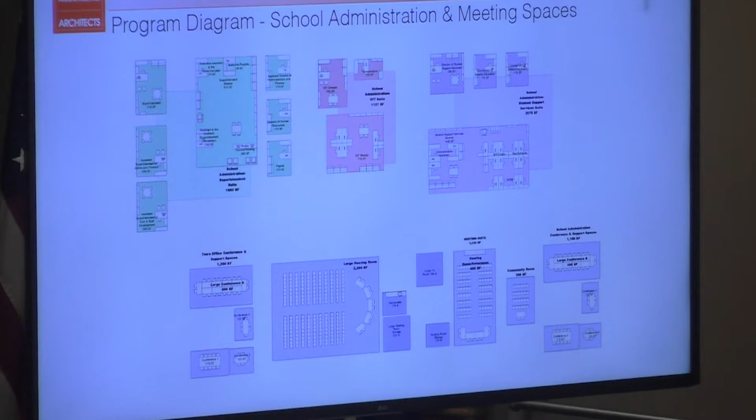We have our engineering office in this building, as you know, and that's already included here. It sounds like, and again, I'm not sure why we didn't pick this up earlier, but there would be some advantages to having the administration in the same place with engineering.

There's 6 people that are in that space right now over at Browns Crossing, so I don't know what that would do to the plan here. Obviously, if that is to be considered, and I suppose if we're beyond the point of including that, we could continue to operate as they have for many years.

It's just that at some point in time, that building is going to have to be vacated because it's not in a place that we can, in the long term, continue to operate, in my estimation.

Well, Phil, correct me if I'm wrong, we're still doing our adjacencies. I know we've gotten to this point, but for 6 individuals, would that be some trouble? We're not beyond the point of no return here. Right, it's not a big deal to add them in.

Correct, so I think this would be the correct time to do this. This is why we're doing it. That's why we're doing it, right. I often say that program diagrams and then actually initial schematic design are really the last part of programming.

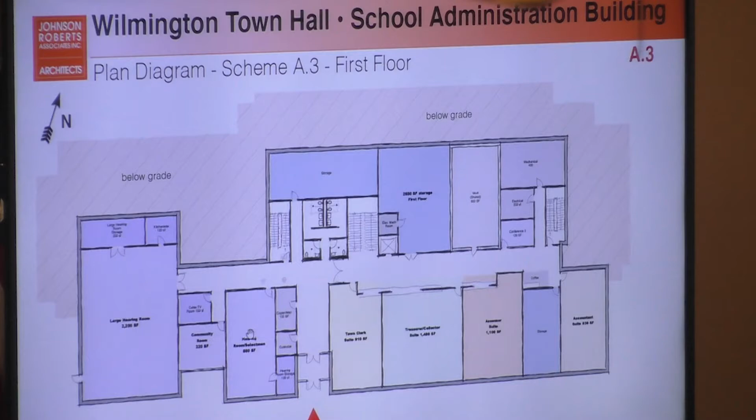You'll notice the biggest change is that I've added a kind of a blob around the back side of the building to remind folks that even though this is just a schematic design drawing, it's built into the side of the hill on the back. Exactly how far that comes down and where the availability for windows stops and starts, we won't really know until we get feedback from a survey and some civil engineering. But somewhere along in here, the grade is going to climb up enough that getting out of a doorway, for example, is going to be hard. Once you get around the back, you'll be completely underground, right up to the second floor. That's why we made this note.

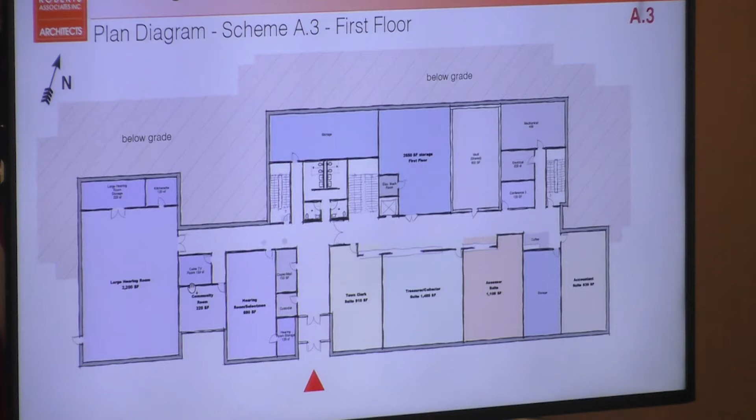So the entrance is still basically in the middle here, the same. This portion of the building has changed slightly—we've got this community room that we've added. The other thing we did is the cable TV room, which was tucked back between the kitchen and storage areas, we've pulled out to the front. I think that makes more sense in terms of providing recording coverage in each of these two rooms and maybe even in the community room, so you can get to and from these spaces, and there's potential to add a little window that shines into each space. We think it's more convenient rather than having to go through this larger room, which may have a meeting going on, if you're trying to do something for recording in this room, for example. So it seemed to make a bit more sense based on what we were hearing.

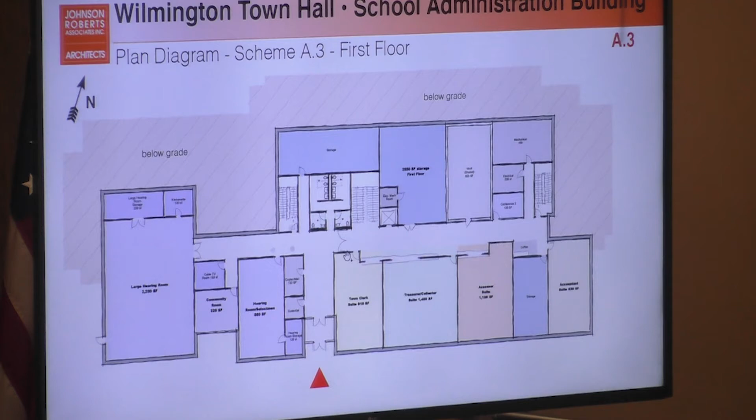So the nighttime closure is there—these doors would close down. They basically stay open during the day; I imagine they could be on magnetic hold-opens, for example, and just stay open during the day. If the alarms go off, or at night, these things would close down, and then you'd have security. You'd still be able to get to the toilets, you'd be able to get to the exits, you'd be able to get to all these rooms, and the rest of the building could stay secure. This provides a closure before you get to the stairs and the elevator, so you don't have to worry about locking the elevator down or any other kind of controls there. So this little suite of after-hours spaces could basically act on its own.

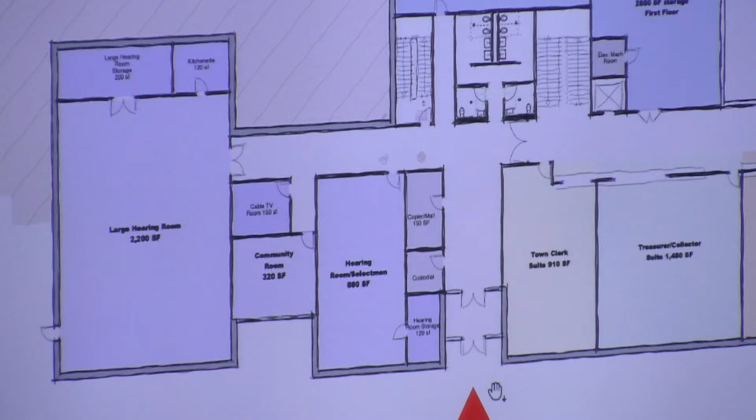We've got two ways out of this larger space. These other spaces are probably not large enough that they need two ways out, but basically there's two ways out of this little suite, so we're trying to think about that as we move through. As far as the office layouts, we basically realign these things. So when you come in the door and pass through these doors that I assume are held open, you could either head up the stairs to the elevator, or the first office you reach here would be the town clerk's office.

What we've done, as suggested, is opened things up so the counters are kind of continuous or semi-continuous. In some ways we tried to get the door for the departments tucked over. This one doesn't have a door, but you'll be able to get in without having to hop over the counter - I'd have to Starsky and Hutch it, sorry, but these really are just diagrams. We had to break the counter so we could get into the department in the center, but it will give you that aspect, and you could lean out and nod to somebody else if needed. This kind of opens the whole space up.

That meant we took the accountant and tucked that off to the side, along with some storage here. But that did mean that if we're trying to get all of these departments right out and together, the idea of having the vault tucked in there and buried doesn't really work as well in this scheme, so we've moved it across the corridor.

The majority of the use of this is probably going to be the clerk's department, and we often see a door directly out of the clerk's into the vault. But in your case, you've got all three of these departments, and a little bit of the accountant, using the vault. So rather than that, this is just a different way to do it - we've done it in both of these schemes.

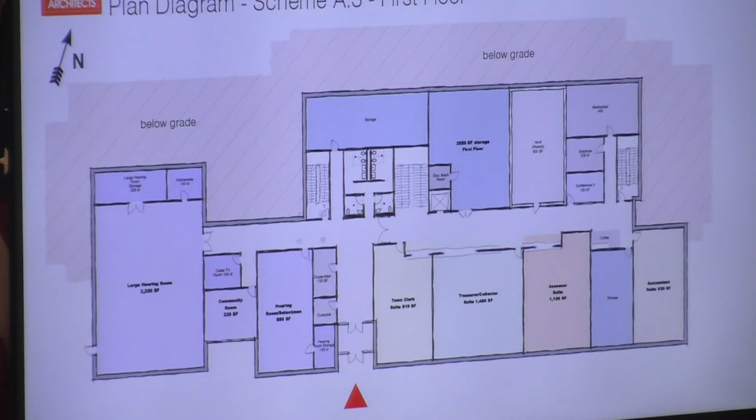Is a pocket door ever an option? Pocket doors are difficult because it's hard to get them to comply with handicap code - you need to be able to operate the door with a closed fist, and when the door disappears into the wall, you usually have to scratch at something to get it open. To make that work, the door has to stick out from the wall, meaning it needs to be bigger to get the clearance you need. They're also more expensive, sound transmission is worse, they can fall off the tracks, there's no electric in the wall where the door slides - it's a bunch of different things. It just makes it harder and more expensive, not impossible, just hard.

But there are gonna be windows all in the front, right? Yeah, again, this is a glorified bubble diagram rather than a real plan at this point, but as we progress we'll start to show stuff like that. We don't have a door in one of the spaces, so why would we expect a window? Yeah, there's no way out of that space.

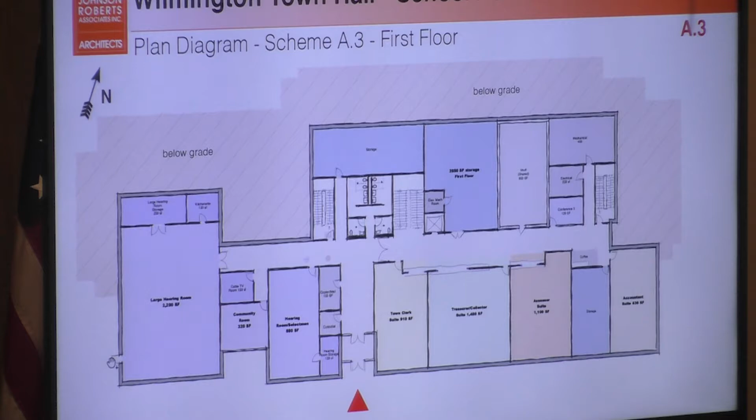To Jeff's point, you have a door over here on the far left exiting out, right? And there's no door exiting out of the accountant's office - in case of a fire issue, you have to exit to the left or exit to the right. In this diagram, you're only exiting to the left to get out. Is there a door over there? That's an exit that looks like the side of the hill - that's it, 'cause it's a stair. So you've got to go into the stair, up, and then out.

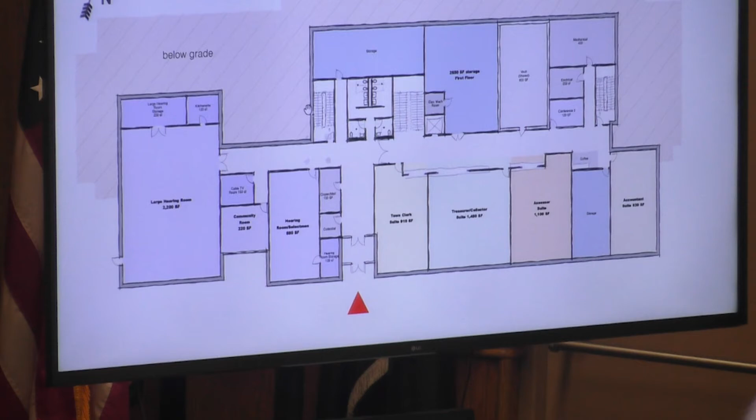You could do that with this stair too - you can get into this stair, up, and out. Diane, can you hear okay? Yes, I can. Okay, all right, thank you.

Well, my point... so soft, I didn't know whether Diane could hear you. I've been accused of having a soft voice too. I thought I allowed him in.

Is there any issue with having the vault door facing a public area? I don't think so. Typically a vault would be left open during the day since it's a pain to haul that big door. We would provide a door like that with a day gate, so it could swing back and be held in place, and then the day gate means somebody just needs a key to get through it.

If you'd rather have it off the beaten path, like off a corridor where the public doesn't go regularly, we could certainly provide that additional level of security. I'd defer to the town clerk and the people who actually use the vault as to what level of security they prefer.

I think they're going to be thrilled with the amount of space they're getting, compared to what they have now. Paul, that's a good point.

Keeping the door hidden down the corridor rather than right out front. Our vault here has an anteroom you have to get into first, and then into the vault itself, which gives some layer of protection and privacy for people in the vault. I think that's a good idea.

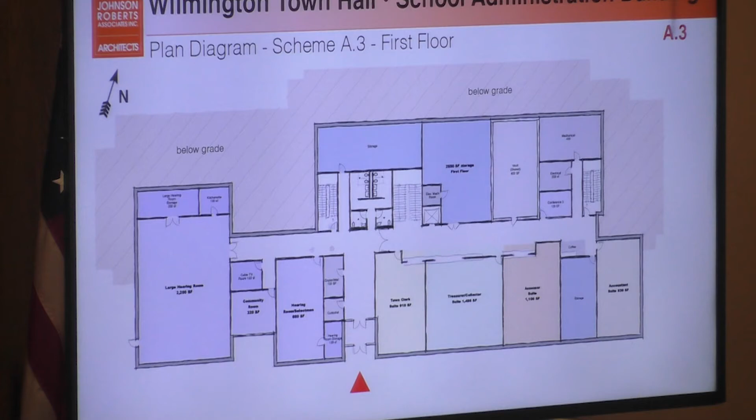Just a general comment - I've struggled a bit with the overall building layout. I understand the premise, but with that large meeting room on the far left in this diagram, when we saw the 3D visuals from the last meeting, it seemed almost like a separate building from the rest of the space. I understand the intent is that you need the higher ceiling space.

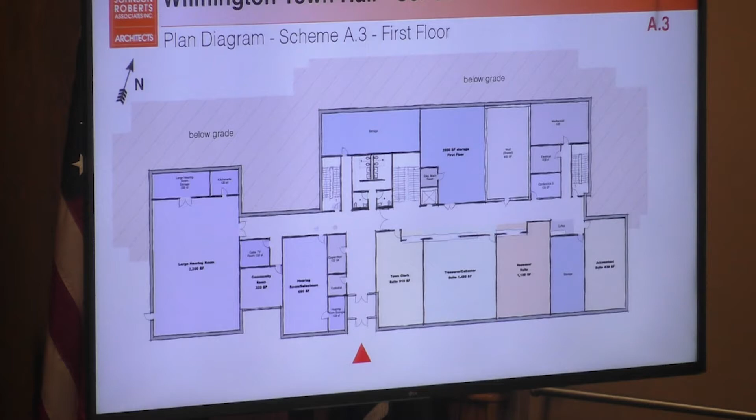Otherwise you'd described it before as almost like a bowling alley. It seems like a thumb on the hand - it doesn't really congeal with the rest of the building. That was my point last meeting too - it looked like an afterthought. I know you guys said that last meeting, and I really think you've got to let them show you a facade before you throw the baby out with the bathwater.

Because bringing that into the main square means you're gonna have a really wasted space above it, since you'd have to make it the same height as the building. Is that what it sounds like you want to do? You know what I'm saying?

Yeah, I'm sure there are ways around it, because there's two things that I look at, and I haven't said anything yet because I'm waiting to see what you added to it.

Functionality is key for me, but also appearance - curb appeal. I'm not a real estate agent, but I want to see something that looks nice, not something where, as you look at the building, you think 'oh geez, they forgot the hearing room or meeting room and added it on after the fact.' That's my concern looking at this.

Could I echo your comments as well? We've been looking at these drawings for a couple of weeks, and when we saw the one with a bit more of a 3D image, I'd agree - the large meeting room does look like an afterthought, like we needed to put this large meeting room somewhere.

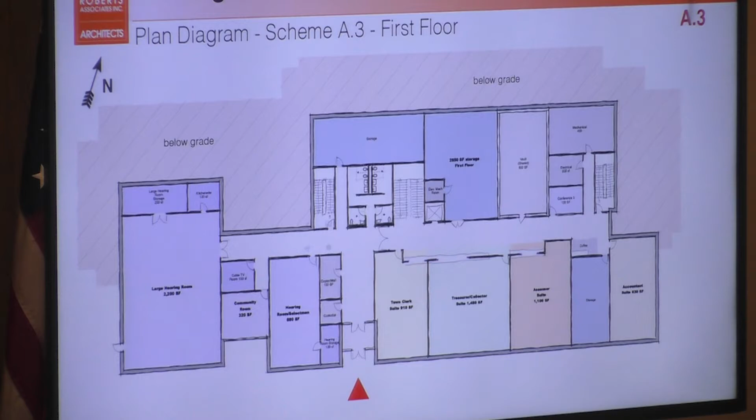But that's not what we have now - saying that the school committee, if they expected a larger meeting, there was absolutely a larger room they could use. So there would be a multi-purpose room, sort of more for when you're expecting larger groups, even when the FinCom would have their public hearing, the big annual public meeting on the articles. Okay, thank you, you answered that question.

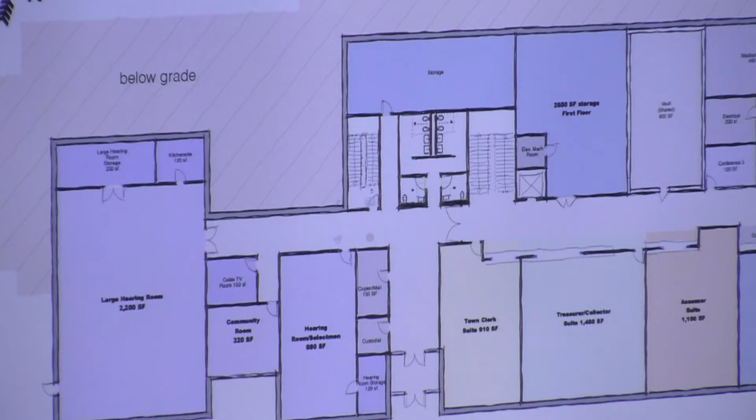And to the other point about it, I actually like it, Phil. I know I'm against the grain here, but it'd be good to see what the town manager and George and Diane have said about moving it. But I like the design. The last one you showed us at the last meeting, I thought it was fine.

And maybe one of the reasons why I liked it is because this particular hearing room is closest to the residents. And it doesn't look - even though the ceiling is high, it looks smaller and it's less intrusive to the residents on that side. So I think that's why I like it, rather than it being overwhelming.

Sure, but that's my own view. I like it too, because I think schematically, in a practical way, you're able to close off that whole area after hours. Right now you have people traipsing through the whole town hall when we get to meet in room 9 or in the auditorium. But I like this because it keeps people after hours in a certain part of the building - you have bathrooms there and all the meeting rooms there.

And for that reason also, as Kevin just said, the ultimate height of this part of the building is going to be lower than the rest of the building. I think it fits in better.

The manager had brought this up, but I didn't want to hijack this part of the meeting until we got to see some of the 3D. Again, that's why I stated functionality was key first, and by being able to isolate that, I think it's great. I honestly believe as you detail the exterior and get your solids and voids with the windows, and start getting your proportions and what works for Wilmington and the green, you're going to find it's not going to look like an add-on.

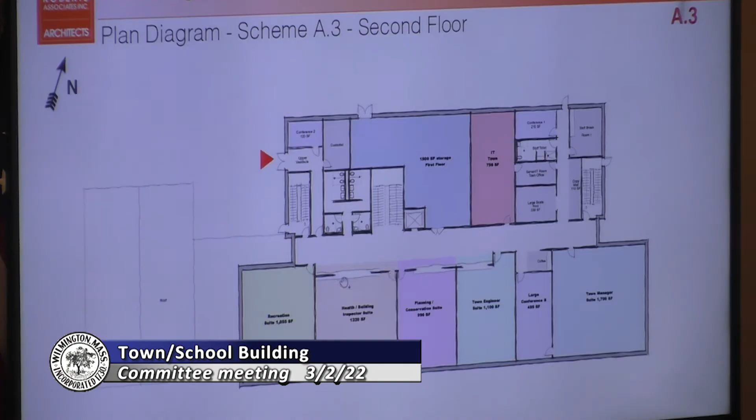So if you take the stairs or the elevator up, this is the upper floor, and again we've reorganized these spaces here. We've almost completely flipped them left to right, but there's a little more reorganization we did in there. Now, the program right now isn't calling for a public counter in recreation, so we didn't add that.

That's one of those things where they've got a table in there for people to come in and have a meeting, sign-ups, and stuff like that. They thought people sitting down at a table would be easier than people lined up at a counter. So you got their input from recreation? Yeah, so based on that — I mean, they have a counter there now, but they don't really need it. They'd rather do the thing with the chairs and individual desks.

So we didn't add the counter, even though we talked about that, but we did move them down to this end. We lined up these offices across and reorganized them a little bit, and again we tried to do the continuous counter thing as much as we could. I think each of these departments has its own door, so that's good. Then we moved the town manager's suite down to the end, and it's adjacent to this large conference room.

In this case, we added a door that goes directly from that department, and exactly where it will end up along this wall, I don't really know. My guess is we'll have offices along the exterior, and this door will probably move up when we get to that point, but that was basically the idea. We've also got a couple of other smaller conference rooms on this floor, and we tried to spread them out a little bit. Again, we're trying to stack the toilets and stairs as we move up through the building, which makes things simpler and easier to do.

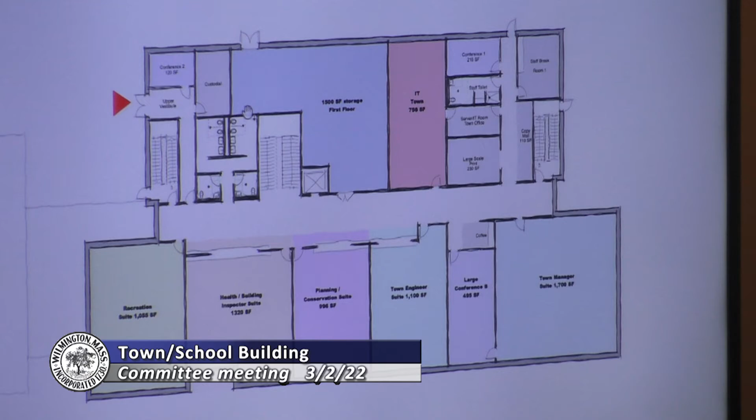The other thing, Phil, is we're providing restrooms here, or toilets, as you call them. What about companion bathrooms? Is that a requirement? It is not a requirement, but what we have here is a gang toilet, so men's and women's basically. In addition, we have two handicap private toilets with a separate door, so you could go in there with a companion if you needed help. These could also be gender neutral, just labeled toilet.

Okay, so having these 2 separate toilets fulfills your requirements for handicapped accessibility and non-gender specific toilets, it kind of covers all the bases. Is that just required on the first floor? Is it based upon the square footage of the building? The total number of toilets is based on the occupancy of the building, which is ultimately based on how big the building is.

The building code references the same plumbing code for the toilet setup on the first floor. It has 2 companions and 2 gangs. Also, what governs the number of ADA toilets? Are they all ADA accessible, or just certain ones?

The ADA is a federal law, actually not enforceable by the building department, but we will make sure the building is ADA compliant. Massachusetts has its own law built into the building code called the AAB, just to make it confusing. We're going to comply with the code for handicapped accessibility under both the AAB and the ADA. So these 2 toilets both meet the handicap code and the plumbing code and ADA requirements.

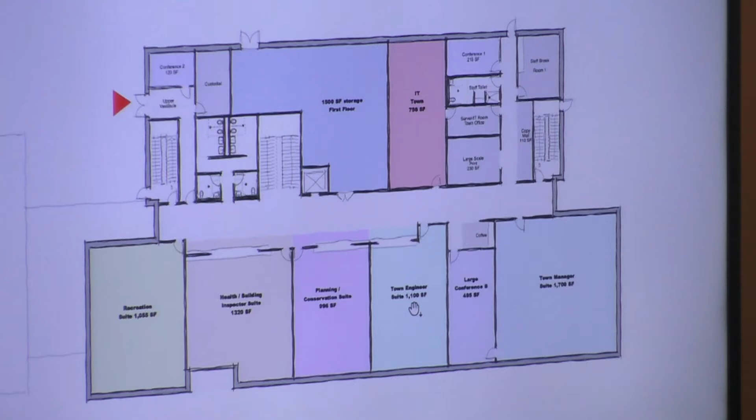Phil, could you go back to the first floor one more time? There you go, A.3 first floor. The break room you were showing, I thought I'd seen it - I'm just trying to work my computer. The break room is on the second floor. There's one for town offices and one for school administration, so one on the second floor in this scheme and one on the third.

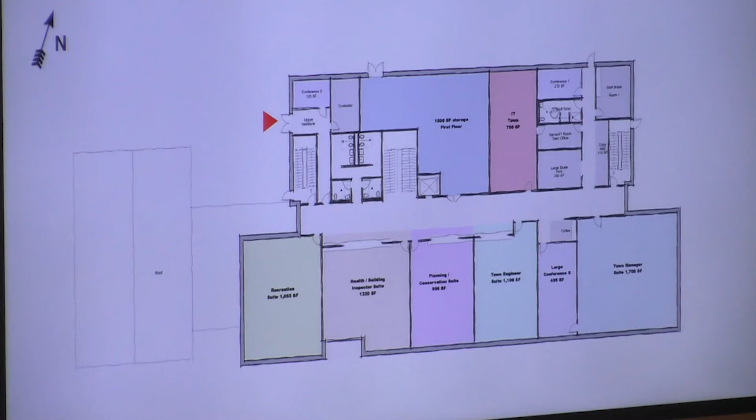Got it, toilets - now I'm with you. Toilets are on all 3 floors. And the staff toilet is across from the break room on the second floor, correct. That makes sense. Okay, same toilets here, here's the third floor - toilets, stairs, elevator stack up.

Exit stairs in this case, so emergency exit would be into the stairs and then down and out for both of these stairs. Can I ask a question on this third floor?

This is the school department. Paul, I'm gonna put you on the spot here - I know the high school has a vault, but do you see a need for a vault, or to secure any sensitive material? I don't know what you do for records. I know special education just really needs a locked room or locked file cabinets. Our payroll records have to be in a locked area and so forth, but talking to people, I didn't think we needed a vault.

You don't need a vault, you just need lock spaces. Yeah, no one indicated that we needed a vault other than what we have at the high school, for transcripts and everything else that's there. So I didn't know - federal records, I think we keep for 7 years, and you have to notify people and get rid of them.

Does it have to be fire rated or anything? Yeah, sure. I just was thinking, all of a sudden I thought of vaults - no vault for you guys, so. Do you know if any other school admin has a vault either? No, never done one. It was just a question - I didn't want you guys to go without.

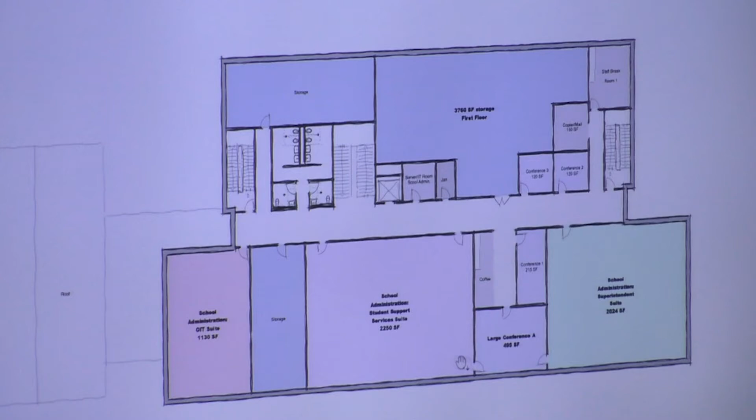One of the things we're going to want to talk about is whether or not you need a general reception area for folks coming up the stairs or getting off the elevator. It's something we need to discuss with the school department, and think about whether it should be out in the open, or whether you want everybody to come into this department first to check in before they make their way elsewhere. But whatever we decide, we can make it obvious where people need to go. The bottom line is we fit everything on the floor.

We know it's going to be jumbled around based on your particular needs, so these are just big, large blocks. But if this isn't really a wall, or if the wall steps around because you're going to have a reception area you want out in the lobby space, we can certainly do things like that when we get to that next phase.

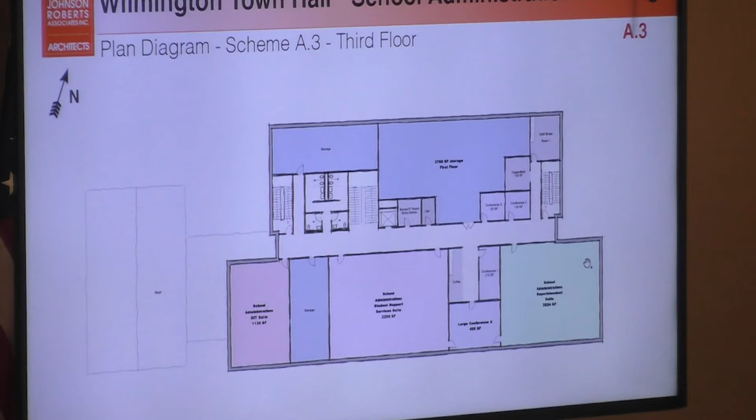We're basically waiting to see what the survey says. I saw them out there doing the survey, but we haven't gotten any results back yet. We didn't spend a lot of time in these woods back here - they close up, tie off, go back, load it in, plot it, and realize they need to go back and shoot A, B, C, D. So they're almost done. I got an email saying I could send over partial surveys, but I don't want to do that and have Phil going down the wrong path. Get them done right - they're almost done.

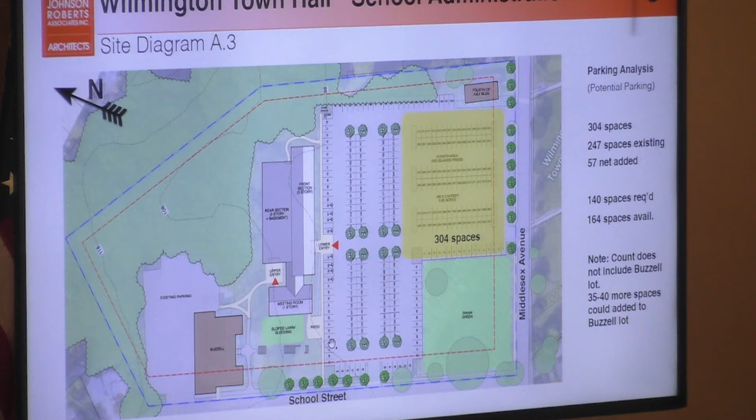This shows the entrance that comes in from the upper floor, from this parking lot, which is possible to do if you'd like, and we're showing that on the plans at this point. The entrance to the main floor is here. We're showing a small patio area here, which serves as a path to get out to the sidewalk from the exit door coming out of this large meeting room.

This is at the bottom of the hill. The reason we show this little patio is it would give you the opportunity to set somebody up here like a little bandstand, and people could sit on the grass. You could do a little outdoor theater kind of thing. We just want to show that there are some possibilities.

We've also labeled this as the sledding hill, and having a patio down here would give parents a place to stand and make sure the kids don't slide out into the parking lot like I'm sure they do right now. That way they can keep their feet out of the snow while they're doing that.

Flexible flyer. Trying to make sure those sleds don't get away. Not gonna catch me.

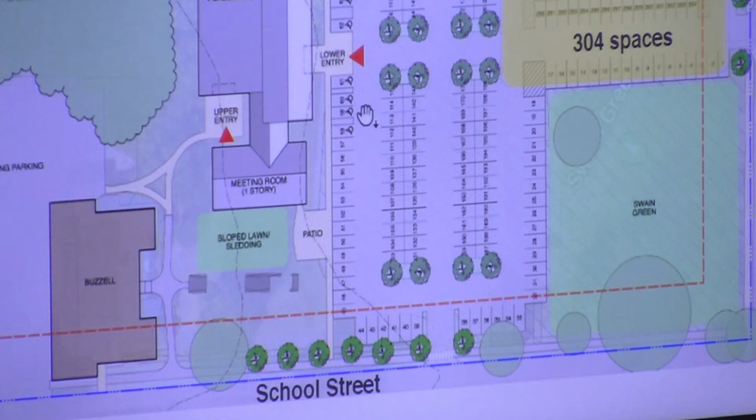And that's obviously the open space without any trees or islands in it. We got a plan that the 4th of July folks used.

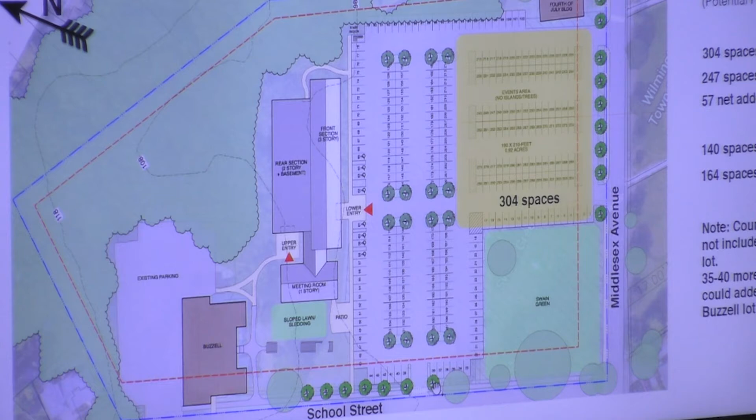I sent that over to you, and we laid that out over in here. If you look closely under here, you can see the cross-hatching that goes through the grass and right through the parking lot. I've got it grayed down and in the background. Basically, the cross-hatching happens up in here too. They laid a polygon over the whole parking lot and the Swain Green, and cross-hatched that whole thing, saying the carnival goes here. It's the whole lot and the green.

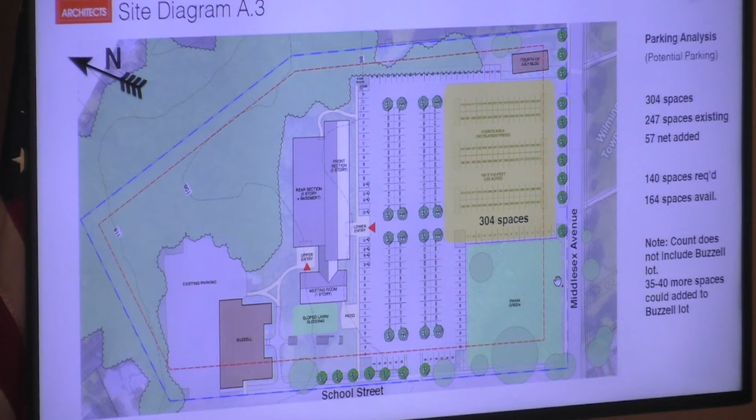It doesn't really give us a good indication of how much open space they really need, but we did put it in there. It provided us with a little additional information too, and allowed us to see that the Google image we had in there was about 5% larger than it needed to be. We were able to shrink that down.

Past the yellow area in the parking lot, to the left, does that include islands? Right below these two trees there's a grass island at the end of these rows. But in the rows themselves, in case we had to spill into that area - that area right there between these trees is wide open. If there were no cars there, you'd be able to spill right into that space.

That too is trying to create as much space as possible for the carnival to lay out what they need. We're trying to provide a little relief, and we actually showed the trees and islands on the model I'm going to show you, just so you can see what we're talking about. It provides a little relief from the wide open space that's there, and I think it still gives you - still trying to keep it open.

We're trying to be friendly to the guys that gotta get in there and plow that thing. They'd love that to be wide open, but we're gonna need some lights in there and stuff, I think. So the 304 spaces is the entire thing? It's the entire thing, that's right, yep.

I noticed, maybe I'm drilling down too much, but I know you have some handicap spots over at the front there. Should there be a few over at the town, over at the 4th of July building? There are some there now, currently. Sure, I can do that.

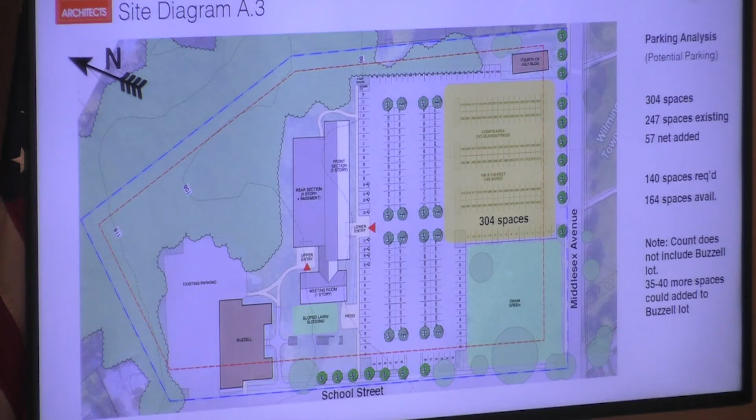I have a question for Phil here. So where you exactly have the building located, are we waiting for more information to find out if indeed there's a lot of ledge there and that you may have some issues with the building? I'm just trying to see if what we're looking at is pretty much the distance. You feel pretty confident that's where the building is going to go?

That's a good question. This is still diagrammatic. I think it's gonna be somewhere in this general area. I don't know enough to be able to tell you with confidence what we'll end up with over there. We need the survey first, and then we'd need geotech. Once we know closer where the building is gonna go, then we can have a geotech go out there and punch some holes in the ground and see what's there for us. But survey is the first step, and that's imminent.

And then the second question for you is where you made that entrance there for like the second floor, and you said that that could be another entrance. Is it possible that maybe the people working at the town hall would have their own parking spaces right behind there?

We have talked about adding on to the Buzzell parking lot. There's a couple different things going on. We don't really know what the ultimate fate of that building is gonna be, whether it's gonna be used for something else, whether it's gonna be sold, I don't really know. We certainly, assuming that everything is gonna stay pretty much the way it is and this building will become vacant or some other town building, you could add on to the parking lot here. If this building is gonna get renovated, or if there's an addition that has to go on there, it's gonna have its own parking requirements, so there's only so far that we can go.

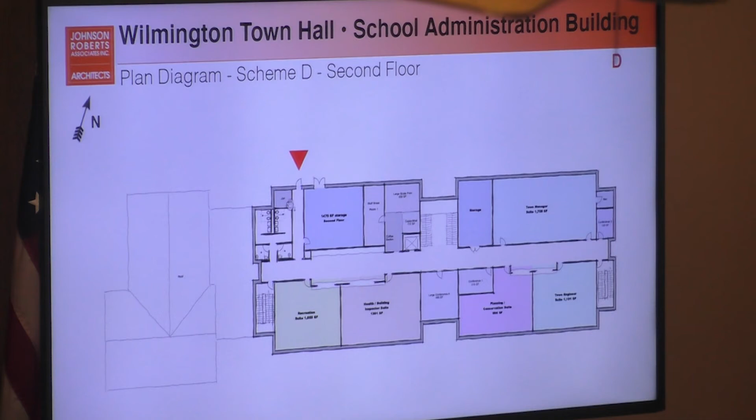The town manager's kind of suite of offices is at the rear—again, there's windows back here. And then we have this second way in from the rear, comes in through here. Again, we've taken some of this storage and had that directly to the exterior as well. We've tucked the janitor's closet back here, where you can bring in and do your storage and so forth.

And when you get up to the third—there's no staff bathroom on that second floor. No, in this plan, Scheme D, it's on the first floor. Right, yep. And again, so the toilets stack in this one as well.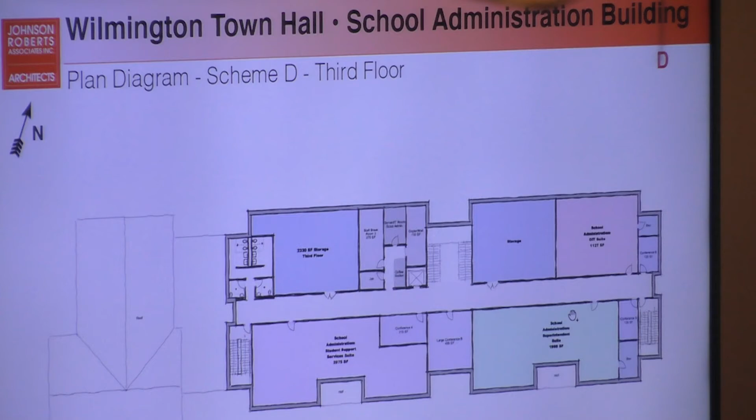We've got some storage spaces across the back, and then when you come up to the top of the stairs, you're greeted by this conference room—we're looking at something maybe with glass, so you can see right outside. It's bringing some natural light down into the center of the building, and I think that probably makes things a little bit nicer. Then you can decide whether to go left or right.

Again, if we wanted a reception area here—that's one of the things we need to talk to the school department about—I imagine it's going to want to be somewhere near the center of the building. The back-of-house spaces are tucked together behind the elevator.

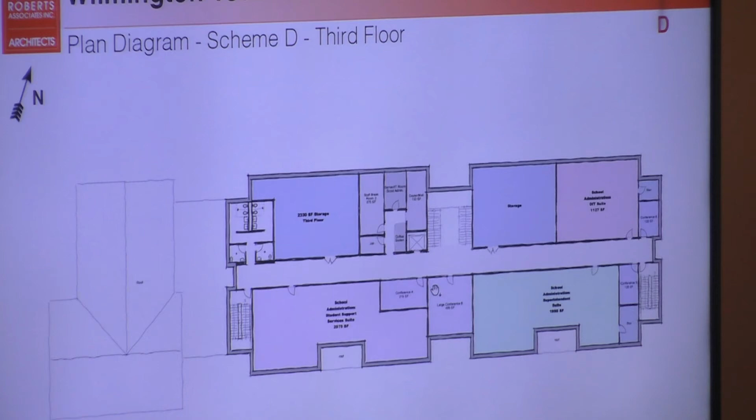Okay, so just to give you an idea, you can see how this building is narrow and a little longer. Whereas the other building stuck back a little further into the trees and probably ended about here, this one is narrower and longer.

And you can see this gabled roof happens here and here, and then we've got little sections that pop out—again, that's to break down the overall scale.

We took the meeting room in this case and turned it 90 degrees, so there's a little L—a roof that hangs back over the selectmen hearing room here, and then this is the larger room. The idea is we're trying to pick up on the rhythm of this building a bit more in this scheme, to respond to some of the concerns you had about this being kind of more tacked on.

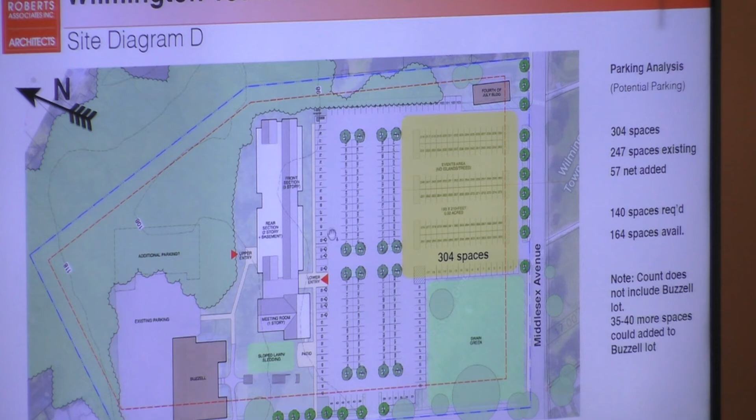The parking lot here is basically the same. The entrance moves a little bit, and we've got the same number of handicap parking spaces—those just kind of slid along with the entrance.

This sledding hill and outdoor space is basically still the same, and we could certainly move some of those handicap spaces over there. In this case, we dotted how big we think the additional parking area might be. That'll give you 35 to 40 spaces, depending. Obviously you'd have to cut down the woods to get that done, but something like that might fit. Once we get the survey, the civil engineer may say it makes more sense to extend it this way.

With that last version you were showing us, the elevation or height of the main portion of the building, is it fair to say that would be the differential between the meeting room on the end and the main part of the building?

There would be less of a differential in height because the roof is lower, since it's longer and narrower. All things being equal, this section of the roof, which is a low sloping roof where I'm assuming the mechanical equipment would sit, is on both schemes at basically the same height. The difference is that this gabled section is narrower, so it's not up as high on this scheme as it is on the other one.

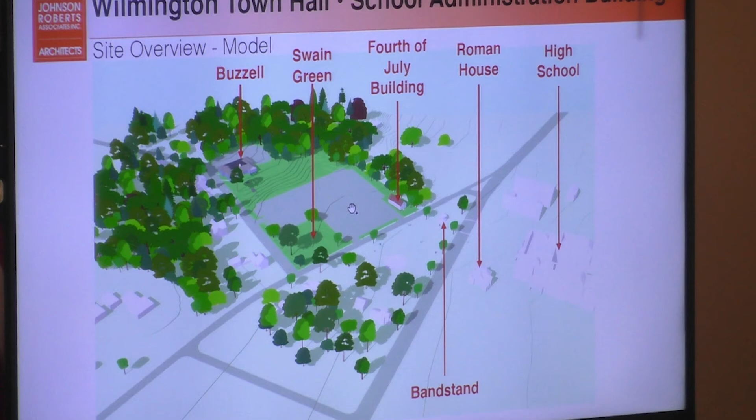There's the extent of the existing parking lot. For the most part it's pretty much the same, we're going a little bit further back. So that's the building we showed you last time for Scheme A with the higher roof on it.

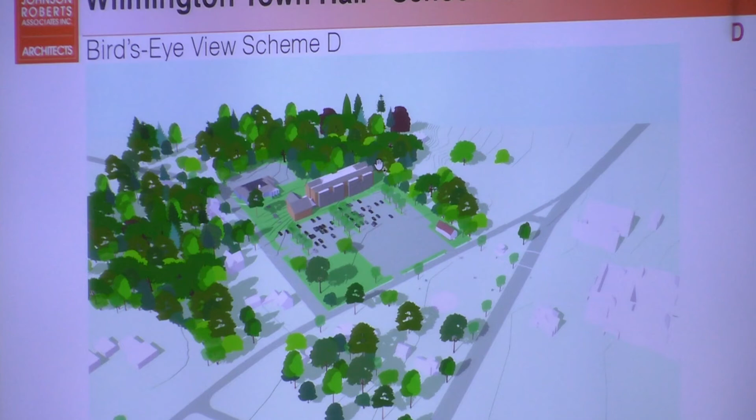In this scheme you can see we've added the islands and the trees, and we stuck some cars in just to help with the scale, so you can see what you're looking at. If you compare that to this scheme, that's D. You can see the gable running across that section of roof is much lower, and the overall height of the building comes down accordingly. Having the gable on this space turned at 90 degrees means you don't have a big gable facing the parking lot. The perception is it's a little lower from this direction, you're picking it up on the other side.

Phil, is that like a double gable on a flat roof, is that kind of what you have there? It's sort of what's going on there. I didn't continue it all the way across because we want to make sure there's space back there for mechanical equipment, but I also don't want to create a bathtub that's just going to fill up with snow.

Like at the high school, we have a mansard that goes around the whole exterior of the building, that's kind of what inspired this. Yeah, the massing almost looks like the high school. That's kind of what I was looking at. It's going to be better looking now, even better. Don't say that, George was on that committee. Wasn't a few of us. None taken.

But that's kind of the idea, you could see if you take a closer look how we're trying to break down the scale of the building so it isn't just a big flat wall going across the front.

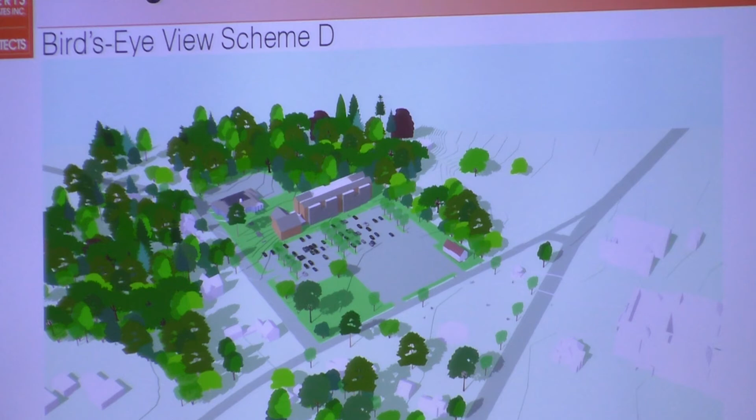Diane, did you have a question? Yeah, I was just going to ask, Phil, at some point, it's so hard to visualize looking at something like this what the building's going to look like. But is there a way to show us something with the windows, with people there and everything?

Are those your 3D models that you architects do? Because it's very hard, I think, even for people watching this on TV, to really get a feel for what the building's gonna look like. Yes, I agree. We're focusing on the inside, and I understand everything has to be in its place. But with an architectural rendering, so to speak, with windows and everything, it would give us a better perspective of seeing what that building is gonna look like, whether it's gonna be a 2-story or a 3-story. And people would really get a feel. I know we're focusing right now on the inside, but...

So Diane, if you just imagine where we are on the senior center committee 4 weeks ago, that's kind of where we're at. Last week we got our first semblance of an exterior. But the first time they showed us the massing, we were all looking at it like it's just a big white blob of mass.

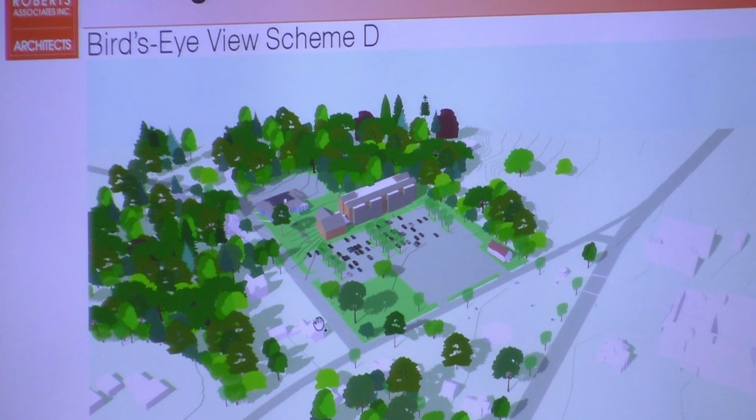And you could tell me, well, we like the fact that it's broken down, but we'd rather not have... you may say, for example, we like the fact that the stairs and the elevator are in the middle of the building, but otherwise we don't like this plan. And then we could take the stairs and the elevator and move them into the center of the plan.

Or if you like, for example, what we've done in breaking these up into two different units, if you think it works better than having all four of them strung together in one big one, if you'd rather do this, we can take that and put it into Scheme A.

I like this, particularly the floor. I agree with you on this. If that could go into Scheme A, I think that'd be good. I like this particular design on the second floor. If that could fit into Scheme A, I'd like to see what that looked like. So more like Scheme A, but with something more like this going on. Is that what I'm hearing?

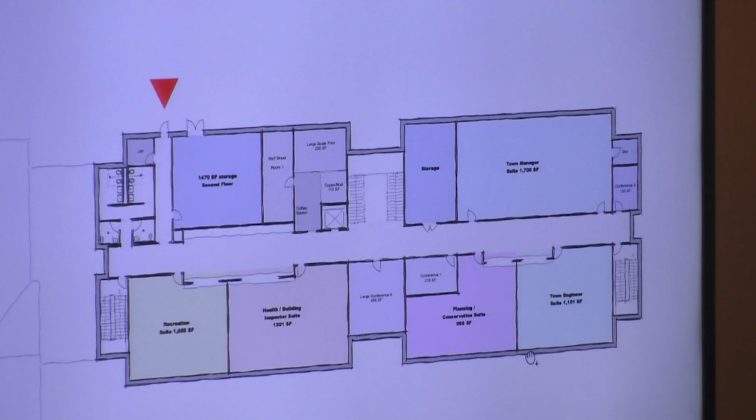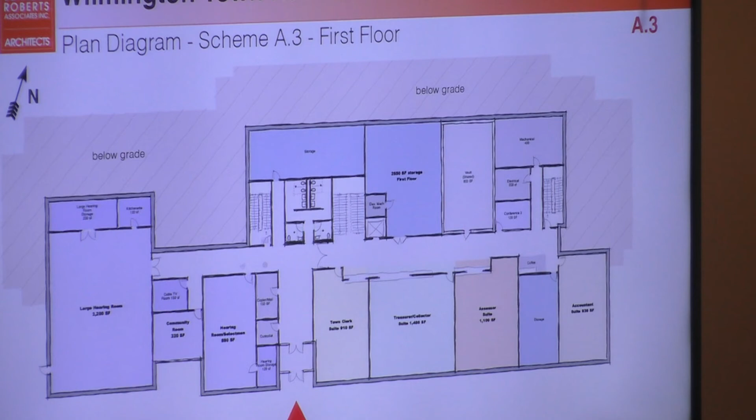A3 is better for two reasons. When you walk into the main entrance on the first floor, you're closer to the staircase, so you're going to get to where you're going quicker, and the elevator's closer to the entrance. I don't know if you have any ability to move that around on D, but the thing I don't particularly like about D is that now that the building is longer, we have to keep in mind there are neighbors on Powder House on the next street, and that brings the building closer to Powder House when we elongate it.

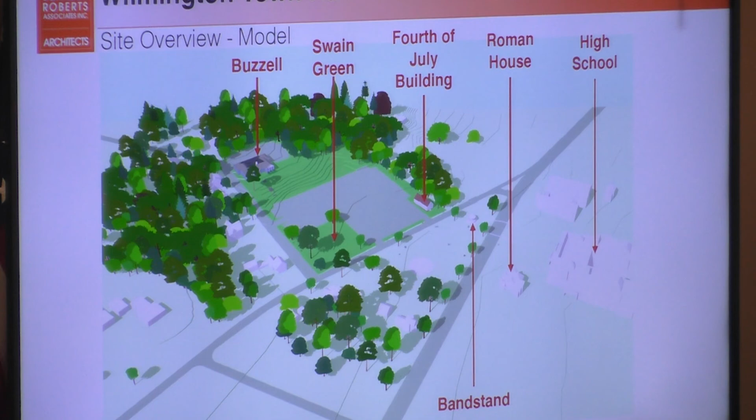So I like A3 as well. All I'm saying is that on D, I like the idea of the layout, having a way to incorporate a counter. But is it A3 just the counter, or is it the clumping it up so that the facade has relief in it?

Yeah, I think the way it's broken out in sections, it looks good also. And also the utility inside.

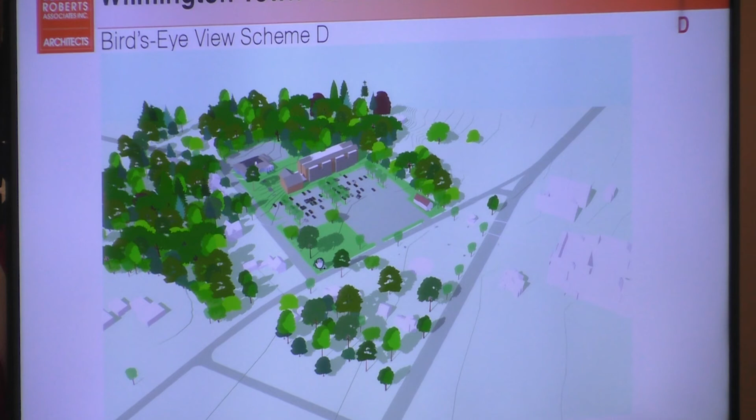The fact that in this D version, the conference room area, you've got that large front hearing room piece where the roofing is consistent with the rest of the building, as opposed to in A, it's turned the other way, so you've got the long roof line for most of the building, but then on the conference room end, it's running 90 degrees from the rest of the roof.

So if people like this suite, I might be able to get the way this kind of lays out right here and put that into A3. Yeah, put that in, it'll be A4 by the time I'm done with it.

As long as we don't go to E. We might go to E. But if folks like the way this area lays out a little bit better, I could try doing something more like this on the A scheme as well.

It sounds like there's some things that people like here, and we can incorporate some of those things into the other scheme, combine them. So is the A scheme this A3?

This bird's eye view scheme that we're looking at, is there a way to do a rendering of it so we could visualize it with a large meeting room a little better for the next meeting?

We ready for that? You want to see a model of what this building looks like before I've designed it? Yes. I don't mean to be pushing.

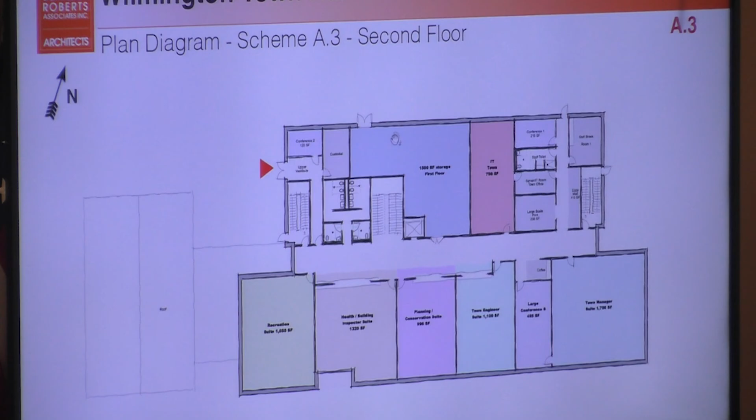I'm just curious if there's a mindset to, for example, the town engineer spot, where you'll have some sort of breakup of cubicles as you walk through, because you see multiple people in these areas when you come into town hall. What I find right now with the depth of this building is I'm walking through someone's area to get to another person's area. So for that reason, I find the other stretched out version a little more desirable, because the offices may all be along windows, say there's 3 people and they're more like this versus like this. Am I understanding that right?

Yep. So there's the engineering department, for example, that's got one closed office, and then the rest of that space is basically open. What I'm showing on the plan is just this pale blue rectangle in the background, and into that pale blue space, all this stuff needs to fit. That's the same for all these departments. A couple of these departments have a series of closed offices, and then some open general space.

So it depends on when you're coming to visit a department. If you're going to go to engineering and want to see the town engineer, you're probably going to have to check in at the counter, and then somebody's going to let you in. You're going to walk through this department where these folks are, back to that office. That's going to be pretty much the same in all of these where you're going to visit someone.

So are these compartments that you're showing here drawn in a measured relationship to that elongated square? These aren't based on anything in terms of a design, actually. This is really just a graphic representation, to scale of what's shown in the building program. So we take all the square footage numbers, and all the equipment and furniture and so forth has to go in there, and then we just create a rectangle and put them all in.

And what that allows us to do is see whether or not there's a little additional space in one of these departments, and not so much additional space in that department. Then we need to decide whether that means we didn't put enough space in one, or it's too much in another. It depends on what they're planning on doing in that space. Recreation needs a little bit more open space because of what they do there, they need more flexibility. Engineering probably has enough, but it's going to depend on how it lays out.

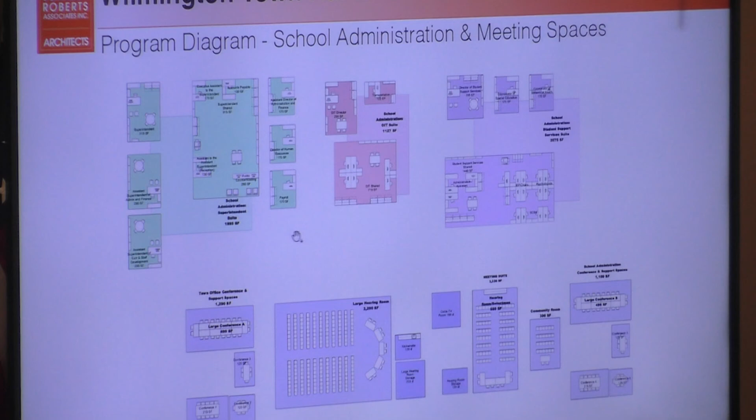We have a little bit of that. There's a waiting area that's kind of built into the health department for somebody coming in to see the nurse. And then there's something specifically in school administration, but we don't have anything else specifically flagged in these departments.

So if you were to come into the town manager's suite, we don't have specific chairs labeled in there, but there is a waiting area with a couple of chairs. That's why I wanted to look at the town manager's office, because I thought that was the only other place we'd considered doing that. I don't think we have any elsewhere.

That's fine. I do like the idea you suggested, maybe on the second story, about having some space where people need to fill out applications.

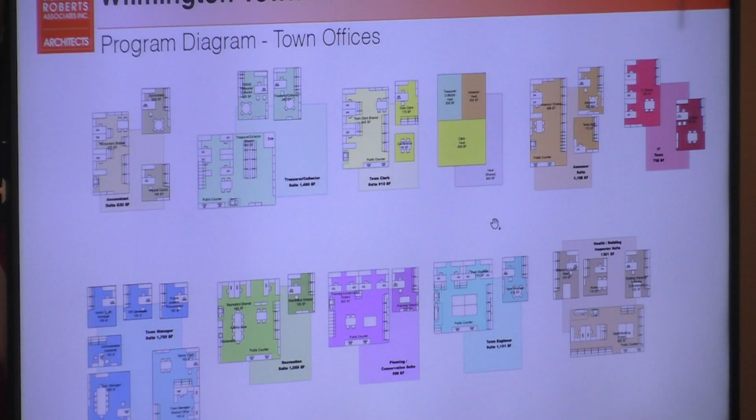On occasion I'll see folks down in the building inspector area using the counters that ring the hallway to fill out documents they're trying to put together. So I think some kind of space like that may be helpful, like the cubbies the kids used to hang their coats in, right on top of those.

We actually did that. Even though these are just bubble diagrams, we're starting to think about these as spaces, and that's kind of what you can see. D is a little bit further along in development than A is, so we thought about this a bit more.

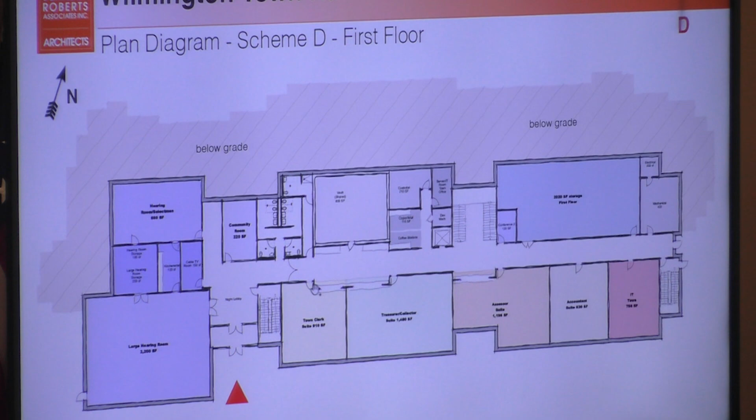The idea is to create a space here on both floor plans, where there's a recess on the opposite side. That would give you a place to stop and take a rest, have public computers for filling out forms, or pulling out a set of drawings. If you came to the building department, this counter is large enough that you could roll out a set of drawings and go over it.

If there's a bit of a line, people waiting to get permits, and the inspector wanted to take you out, he could come out and meet you, lay the drawings out right here, and go over them for 10 minutes. Now, you could certainly go sit in a conference room and spend half an hour, but this is just another option.

We've done that in some other town offices and it seems to have worked out. There's enough built into the circulation area in the building to accommodate something like that.

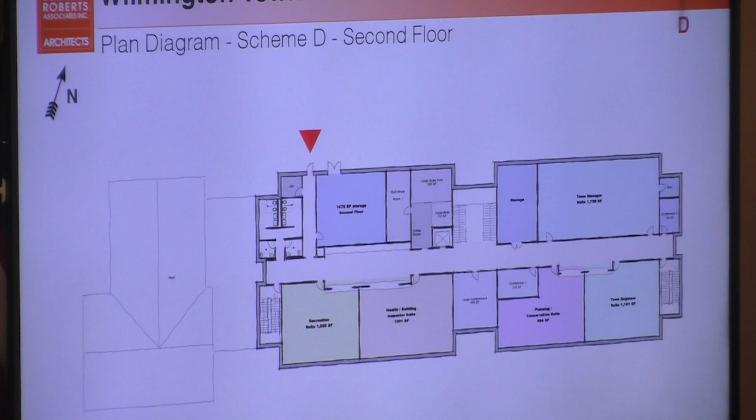Philip, maybe I'm too early with this question, but I'm thinking of some of the neighbors on School Street who are possibly watching this tonight. We're talking about this large meeting room being on the end, which would be closer to those neighbors. Is there a way that... of course they're not understanding some of the things we're understanding here, what we're looking at.

But would it be possible, maybe at the next meeting, to have drawings for a side elevation, giving them some idea of what that height is, so they may not think it's so massive? I think George said that when we took down the old Swain school, they liked the visibility and the clear visibility.

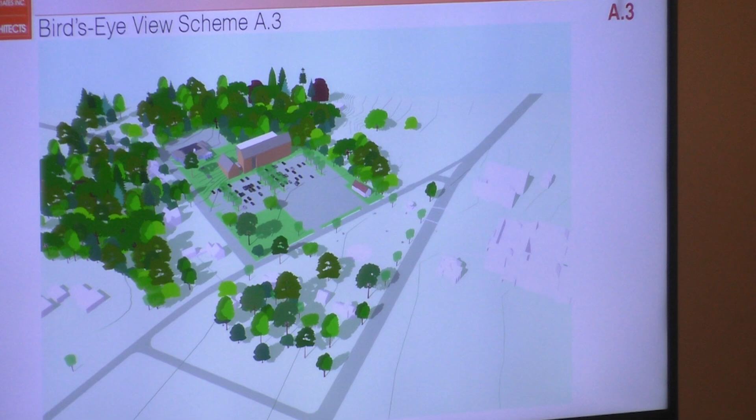Now, the Swain school building used to sit where it is. Now they hear that this additional room is going to be on the end, and I don't want them to think of this as being so massive. So is there a way to do an elevation? I guess the question is a side elevation for them, and maybe even a front elevation, to give them some idea of height.

Next time, something closer to School Street, a closer view from the people that are going to be on School Street. He's just trying to nail down the building roof line. I mean, it's premature because if you look at just the modeling on this, Diane, their houses are a block.

They're not detailed. The building's a block, they're not detailed, and their houses are obviously detailed. When you look at their houses, the scale shrinks with the detail, and the same is going to happen with this building. If you show them the mass without the detail and the solid and voids of the facades, it's not going to be an accurate representation - it's going to look like a big mass.

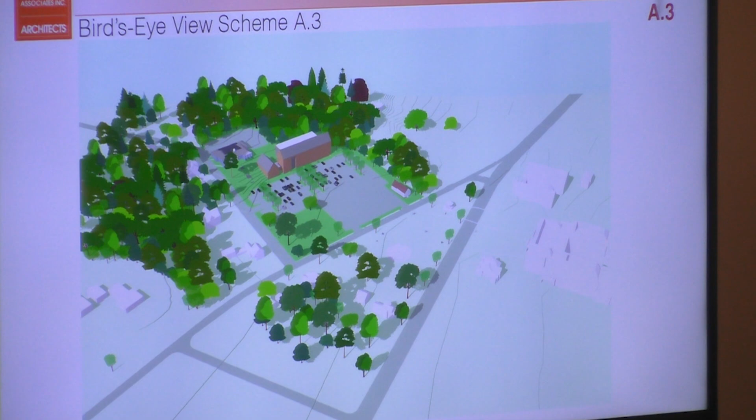Given that we've grabbed a couple of different things from a couple of different schemes, I'll probably retire scheme A and come back with scheme E. If I come up with another idea, I'll call that F or something - unless you'd like me to keep the A designation for old time's sake, it's completely up to you. Oh, that's good, all right. Plenty of letters in the alphabet.

Any discussion for our next meeting, which will be the 16th? I'll contact WCTV to make sure we have our coverage. We are definitely meeting next week, even though you're having town meeting the night before. Hopefully it'll be a quick town meeting, once we get our quorum. And we're back on schedule with the schools - this is your off week, right? Correct, so we don't have to adjust anything. I thought we were off by a week, but I guess we're not. I think we're good.